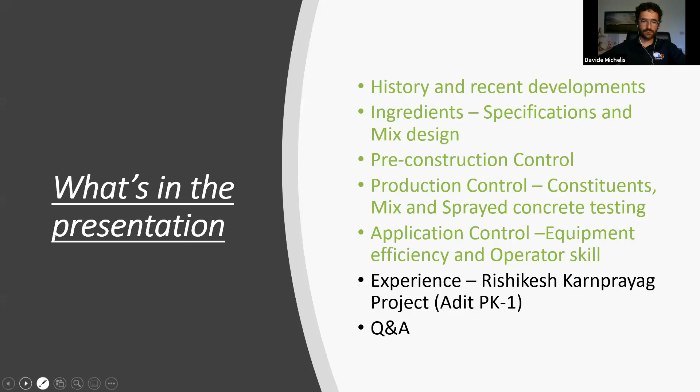Starting from a bit of history about shotcrete, going back to the 70s, where the dry mix process was especially accelerated with alkaline powder accelerators. So we are really at the beginning of the technology employed inside a tunneling project.

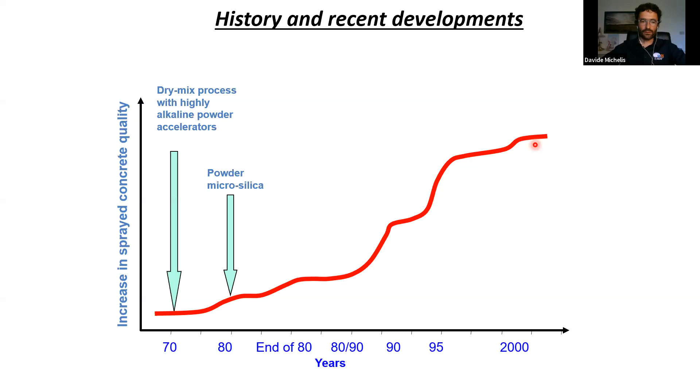In the 80s, there is an introduction of powder microsilica in order to have a better mix design and extend the durability of the mix design. Then at the end of the 80s, we are looking at the introduction of alkali liquid accelerators, replacing the powder ones, especially in the dry process.

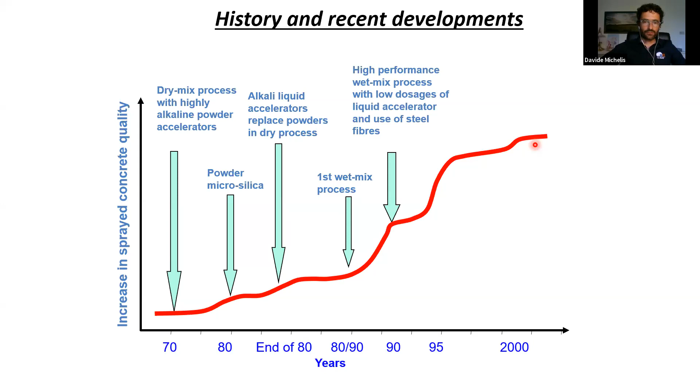Changing from the 80s to the 90s, we are observing the first wet mix process, which is the base of our actual technology, almost employed all over the world. In the 90s, we have the chance to extend performance and get a high performance wet mix process because of low dosages of liquid accelerators. And we are looking also to the use of steel fibers to enhance the flexural strength of the shotcrete.

Then later in the 90s, almost in the new century, we are looking for new alkali-free accelerators. So the technology about the accelerator is changing dramatically, with the use also of microsilica slurries to extend the durability of the final product.

Steel fibers also are enhancing their properties, and the way of application is improved. Luckily, also with the use of very powerful plasticizers, we can achieve water cement ratios below 0.45, which we will see later is an extremely interesting point for having a high quality shotcrete.

And we are passing from a manual application to a robotic spray system, which are giving the production rates that we are having today.

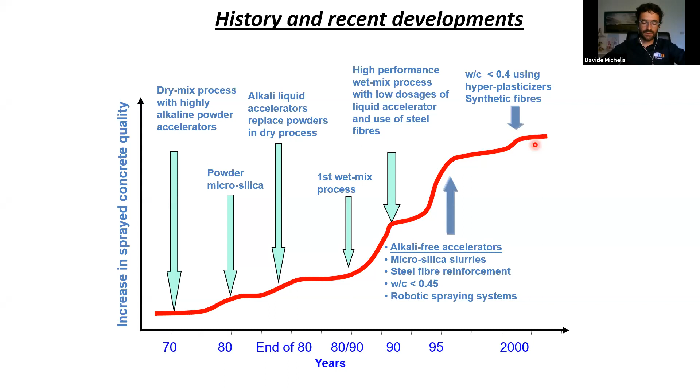Nowadays, we are looking to, and we are succeeding in getting mix designs with water cement ratios below 0.4, and also the use of synthetic fibers, structural synthetic fiber, is spreading around. So we are having very good results also with the use of polypropylenic fibers.

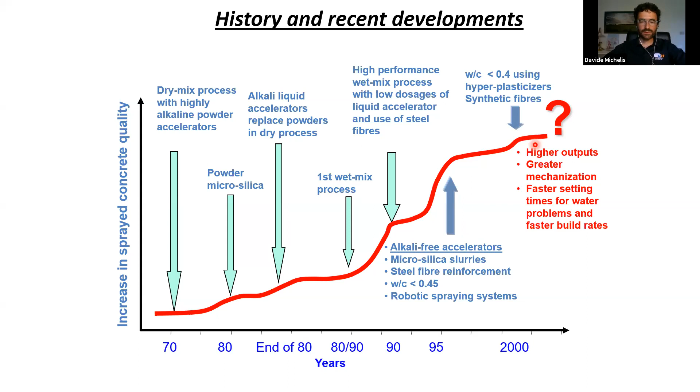What's in the future? Hopefully, also looking for a higher production rate. Of course we need higher outputs, but also enhancing the properties of the shotcrete in order to have a proper thickness applied on the surface, and a proper strength development to get a faster setting time and reduce problems in the presence of high water inflows.

Just some nice pictures coming from the past. On the top left, you are looking at maybe one of the first dry shotcrete machines. It's a picture taken in 1907, so more than 100 years ago.

And you will see bottom left Mr. Carl Akeley, one of the founders, one of the first men to use shotcrete as an industrial process for underground construction. As you can see in the other two pictures, how difficult was the application, especially overhead of the shotcrete, so it was needed to build up scaffolds and use not very automatically driven equipment.

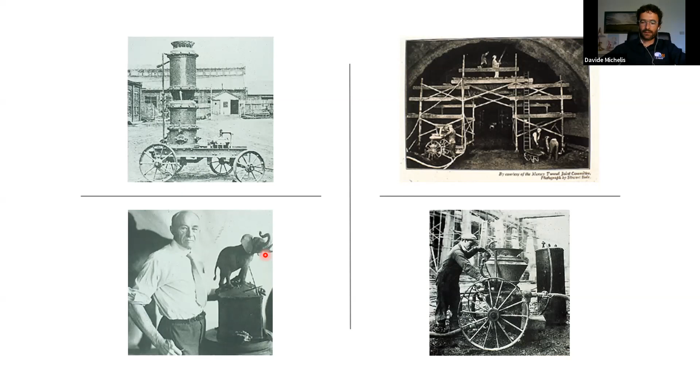And if we compare with the new equipment that is nowadays available on the market, we can understand how much higher the production rate could be, and how bigger and nicer could be the quality of the shotcrete that we can produce in our time.

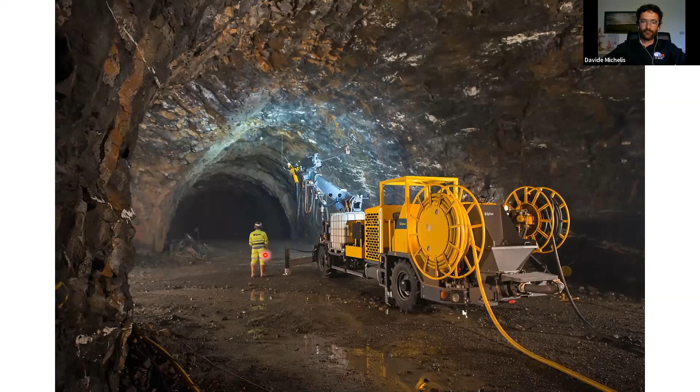So let's start with the ingredients which compose a proper mix design for a shotcrete application. First of all, the cement is of course one of the most important parameters and products that we have to consider for a good mix design, especially talking about the fineness of the cement.

Aggregates, different shape, it depends if it is crushed aggregates or if it comes from a riverbank.

Water, of course, we need to put water, especially tap water, as much as possible in order to get a high quality mix design.

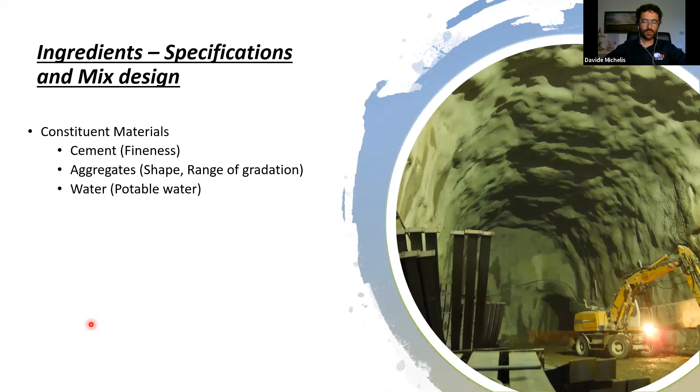Admixtures that are both to be placed inside the mix design during the production process, and also like the accelerators to be introduced in the mix design during the application, right at the nozzle before the product flows out from the boom of the spraying machine.

We can also add, and sometimes it is absolutely mandatory to use mineral fillers like silica fume, microsilica, in order to reduce the water amount and increase final strength and durability of the final product that we are applying on the surface.

Fibers, as introduced before, can be both steel and plastic, and we will see later which ones. This is an additional product that is enhancing the flexural strength of the product.

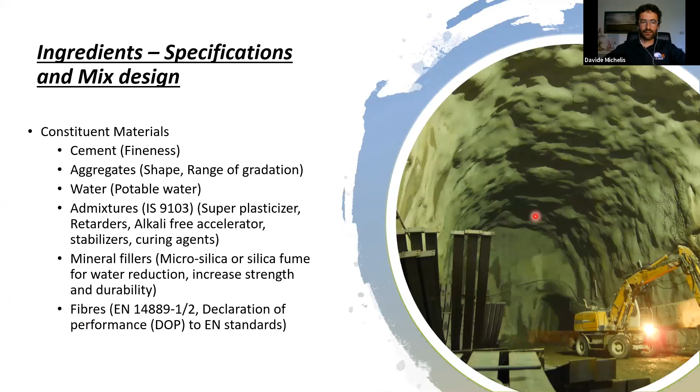Cement, of course. Not all cements are proper for use with a shotcrete mix design. We have to think about what kind of mix design is needed. For example, we need a pretty high fineness of the cement, 350 square meters per kilo, and a minimum amount of OPC of 360 kilograms per cubic meter when we start to design our mix design.

As a general rule, but depending a lot on which country we are designing the mix for, the minimum cementitious content varies between 390 and 450, in some situations even higher, depending on performance required and on which kind of cement is considered for the mix design. The cement type influences a lot the performance, not only the final hardened shotcrete, but especially the workability and fresh status of the concrete. Remember that each recipe is unique, so we cannot replicate a single mix design everywhere, because performance will change a lot according to the cement kind, the aggregates, and the admixture we decide to put inside.

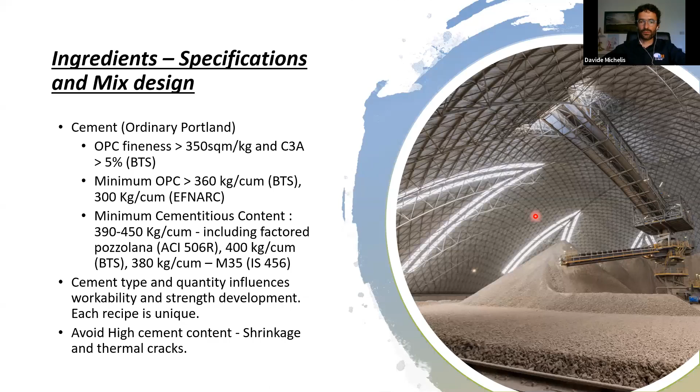Water, along with cement, is I think the most important component to be properly dosed and used, because we need to use tap water. This should not have any chloride, sulfate or oil inside, but especially the water content in the mix design should be as low as possible, lower than 0.45, because the quality of the shotcrete will rise a lot using a low water-cement ratio. The ideal range is between 0.38 and 0.42, and with these values we can achieve high strength and durable shotcrete, but also during the application sequence we can really reduce the rebound. We can even face difficult situations like water at the tunnel face.

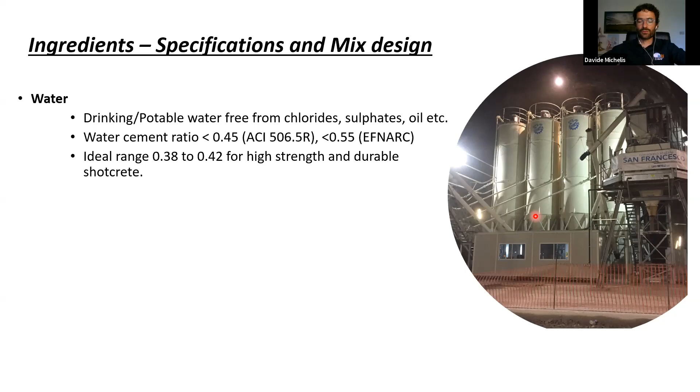To achieve these low water-cement ratios, we can use superplasticizers and retarders, which enhance the workability and the open time before application takes place. Of course, we have to consider which kind of superplasticizer admixture to use in order to avoid any wrong effect on the setting time of the product.

Then accelerators - we have to add the accelerator right at the nozzle of the spraying equipment in order to accelerate a few seconds before the shotcrete hits the surface of the substrate. Adding the accelerator at the nozzle causes a drop in final strength compared to an unaccelerated mix, and this can be up to 70-75% of the unaccelerated mix. But with an alkali-rich accelerator, the drop is not only 20-25%, but we can even achieve a 50% drop. So it's very important to select the right amount of the right accelerator.

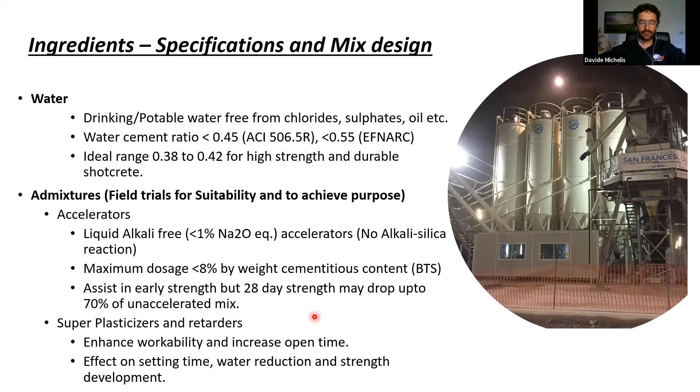This is a scheme that I love to use, because it really shows the concept of water-cement ratio. On your left side, you see a low water-cement ratio mix design, and the components, the aggregate and the cement, are pretty close together. So when the hydration process of the cement happens, there is a better connection between all the components. On your right side, you see a high water-cement ratio mix design, and you can understand very well that it's more difficult for the cement to connect all the particles together. So we are facing lower strength and, of course, higher porosity and permeability.

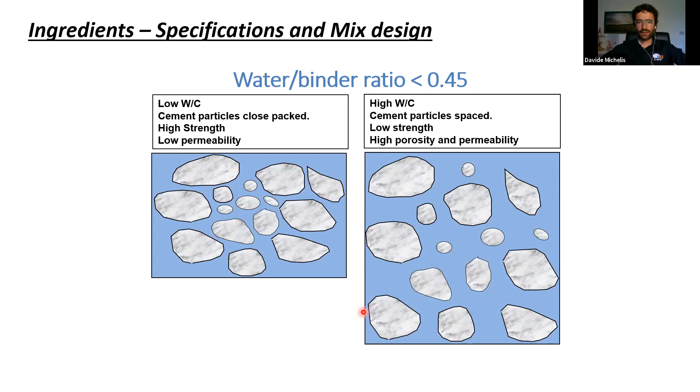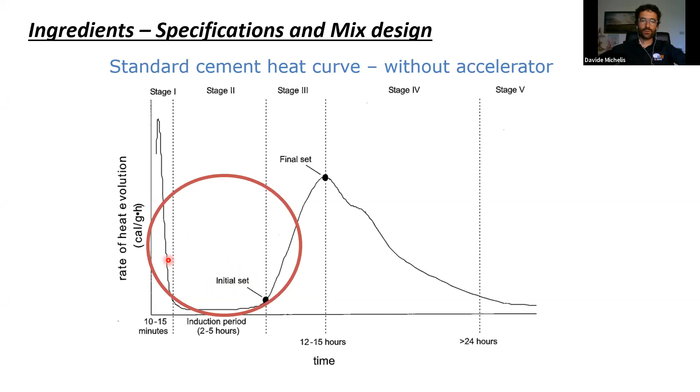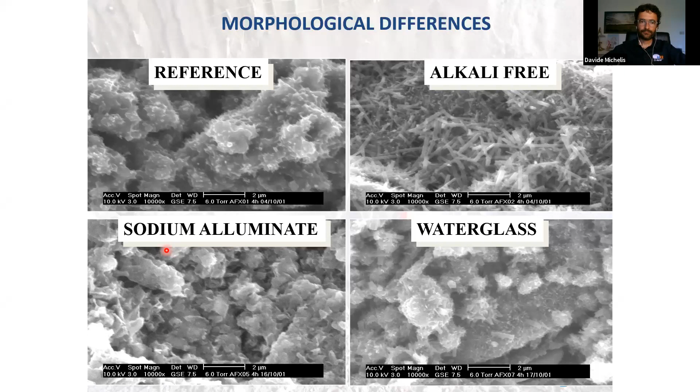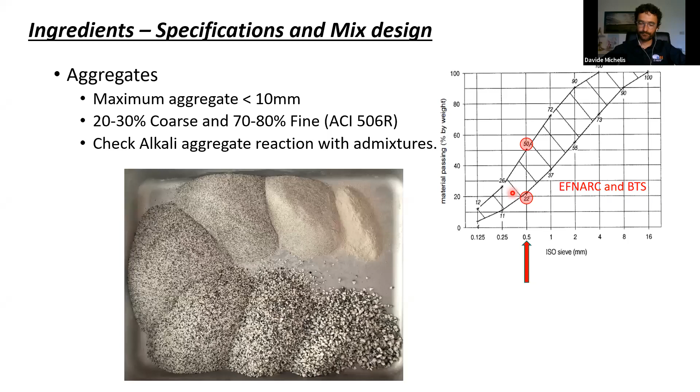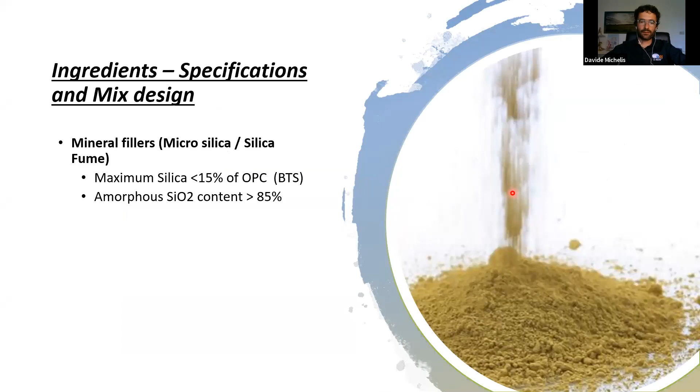There are also some mineral fillers, as additional ingredients. As a rule, we should not exceed 15% of the OPC, and this should have an amorphous silica content higher than 85%, and a very high specific surface in order to be kept inside the mix design properly without any bleeding problems. Of course, the compatibility with accelerator must be checked before any qualification process.

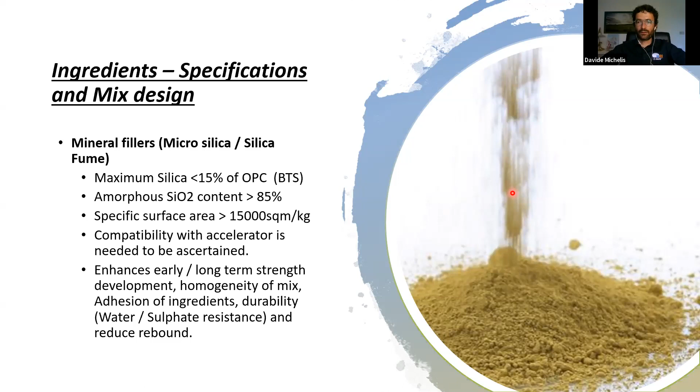What's the aim of putting mineral fillers? It's, as we said already, to enhance the early and long-term strength and durability. And of course, it enhances the adhesion of the mix design during the spraying sequence.

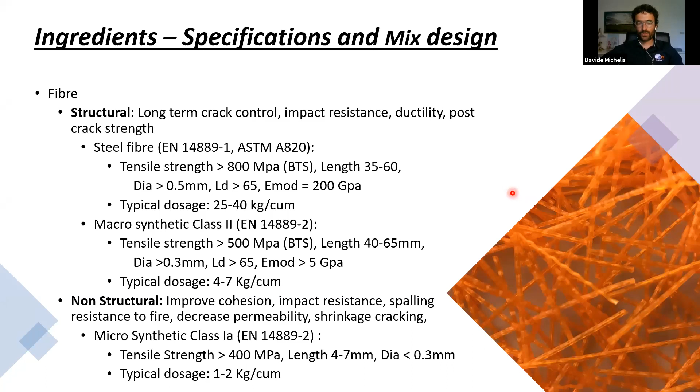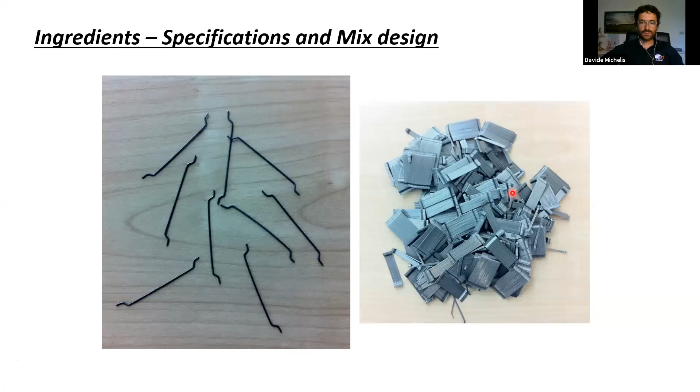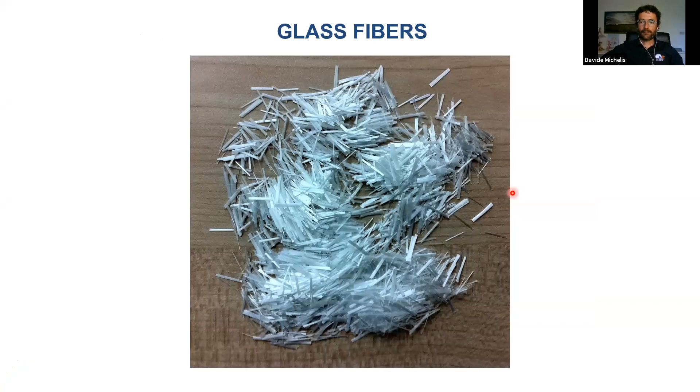Just a few slides. I think most of you already have good experience with steel fibers, hooked and glued together. In some situations, there is also use of glass fibers, but it's really a very small area. Synthetic fibers, as I said, are gaining market share against steel fibers with very good results.

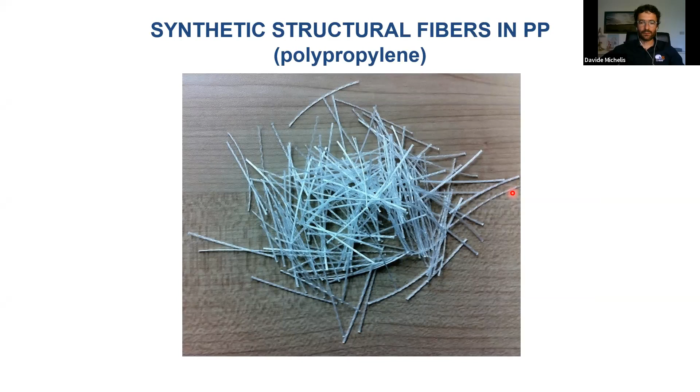I want to complete my part of the presentation by giving some tips about application methods. Most of the application is made with a wet process, but still sometimes there is a need for applying the dry mix method. This slide shows in a very schematic way how the system works.

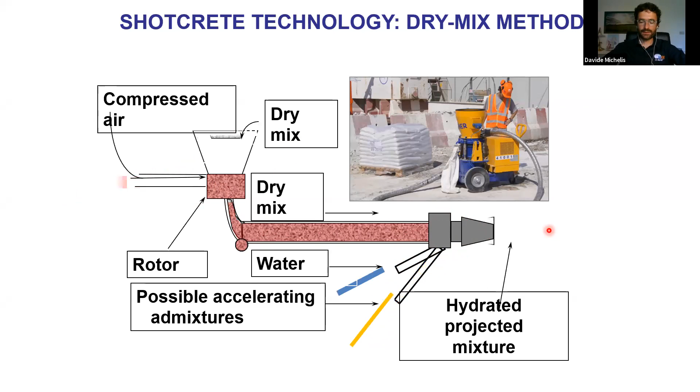There is a hopper where the dry mix is put inside. On the left side, the compressed air pushes the material through the hose, and at the nozzle, only at the nozzle, water and the accelerator are introduced into the flow in order to get the proper acceleration of the mix design.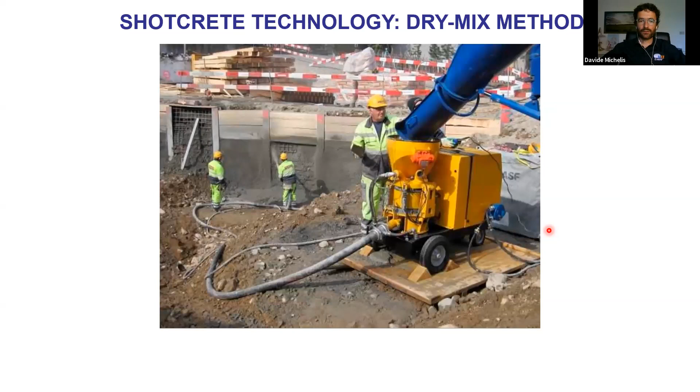This is the kind of normal application, an example of the way the workers are doing the job. Of course, this can be used only for small surfaces, a very confined space where a big boom for automatic spraying is not able to enter.

The accelerator is dosed according to the different situation we may face, depending on whether overhead or on the sides, and we are getting the final shotcrete that is sprayed against the substrate.

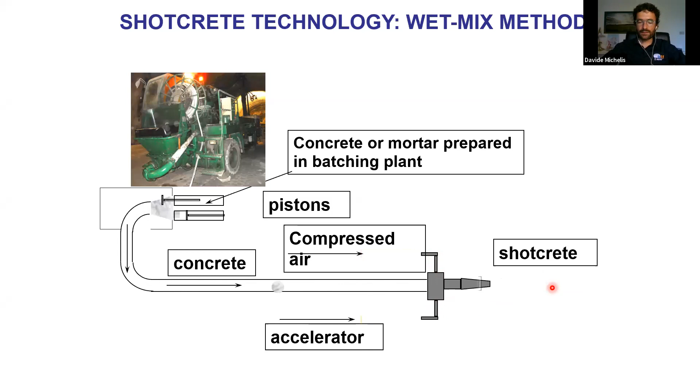Thank you, Davide, and welcome again to all the participants. So we'll be carrying on forward with the pre-construction controls.

As you are aware, before qualifying any shotcrete, we need to control the quality of the shotcrete before actually applying it on site. There are some mandatory pre-construction tests defined in the European norm 14487-1, and we refer to class 3, which is the inspection category defined for underground traffic, railway tunnels and road traffic, and strengthening of the ground.

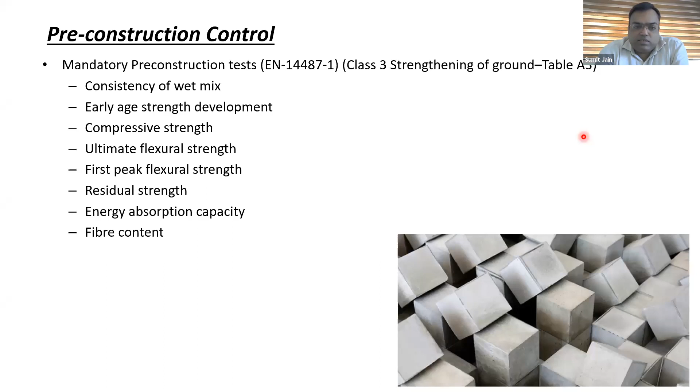There are a number of tests to be carried out: consistency of the wet mix, early age strength development test, compressive test, flexural strength, residual strength, energy absorption capacity, and fiber content. The first 4 of these tests are for plain shotcrete, and the later 4 are for fiber reinforced shotcrete. So the type of test will depend on the type of application and the functional requirement of the shotcrete.

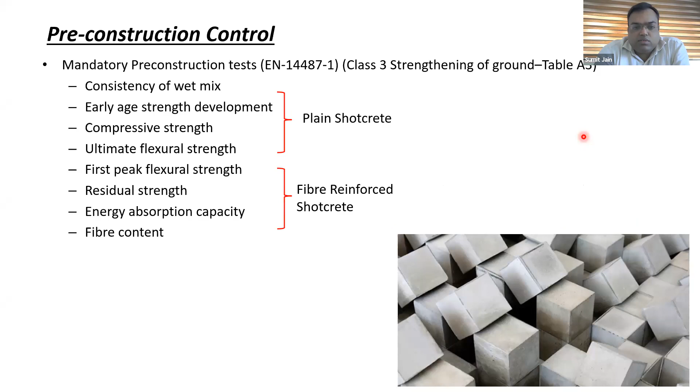Now we will cover some of these tests in brief. This one is the early strength requirement for young age shotcrete, and normally there are 3 classes as per the European norm: J1, J2, J3. Usually we refer to the J2 class when applying in thick layers, including overhead applications, where there is a very high output requirement of the shotcrete, very low water pressure, and load on the newly sprayed concrete from subsequent works.

So when we qualify a shotcrete as meeting the J2 class requirement, all the strength results have to fall above this J2 line. This is a plot of compressive strength versus time in minutes and hours. For the initial period up to 2 hours, or say less than 1 MPa, we use a penetrometer, and for more than 1 MPa, we use the Hilti shot bolt method to test these early strength requirements.

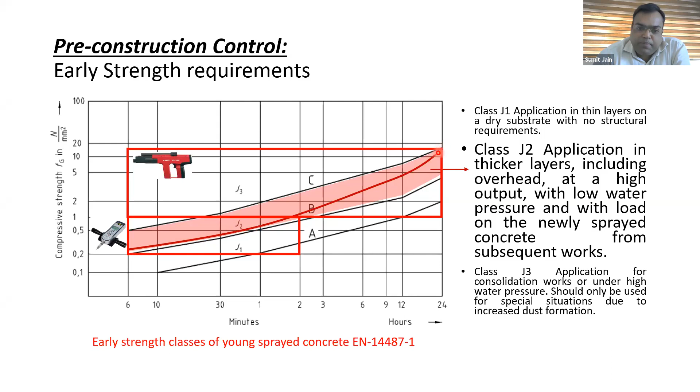Mostly the shotcrete strength should start very near to the J2 curve, and by the end of 1 day, or 24 hours, it should actually reach right up to J3. This is somewhere around 12.5 to 13 MPa, and within 1 hour it should have a 0.5 MPa strength.

Next is the residual strength requirements. The figure shown on the right side is a 4-point bending test. Here the beam specimen is prepared with shotcrete, then tested in the standard apparatus, and the categorization of the class is done by the deflection and the residual strength of the specimen. For example, these are the categories defined in the European norm: there are 3 deflection levels and 4 strength levels.

So if we qualify shotcrete to be D2S2, it should have a minimum residual strength of 2 MPa in the range of 0.5 to 2 mm deflection. The deflection is measured at mid-span of this test.

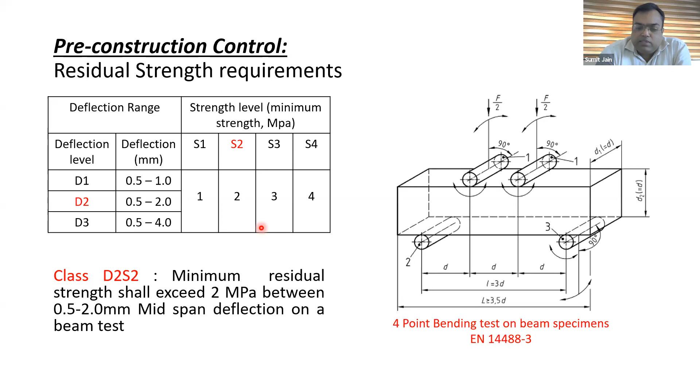We'll just see a graph of how it plots when testing this specimen. As you can see, the strength is gradually decreasing with the increase in deflection. So in the area between 0.5 mm and 2 mm for a D2 categorization, this graph should lie above 2 MPa. This is the 2 MPa line, this is the strength class line, and these are the deflection class lines. In this case, the graph plotted for residual stress versus deflection categorizes as D2S2 class, because all of this curve lies above 2 MPa.

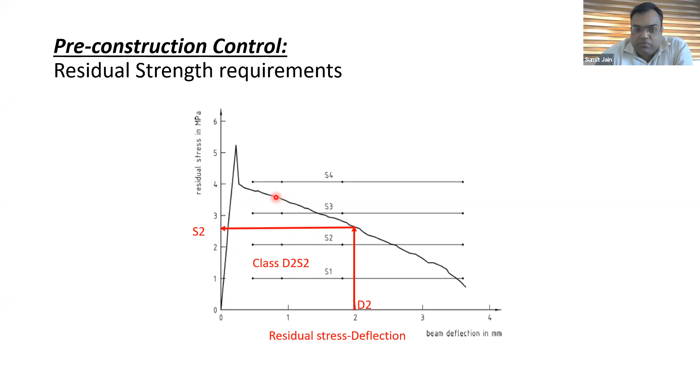Moving on to other requirements, in some projects we use the Q support system, and there is a requirement of energy absorption values to be met before qualifying the shotcrete for various Q classes. This is a graph showing Q value, rock mass quality, versus span or height by ESR ratio, and this is a very well known graph.

Here you can see, in the bottom left corner in green highlight, a different classification of the energy: 3 classes are defined, E500, 700 and 1000. These are the joules which the panel absorbs when tested for 25 mm deflection. We'll cover more on this in the later slides.

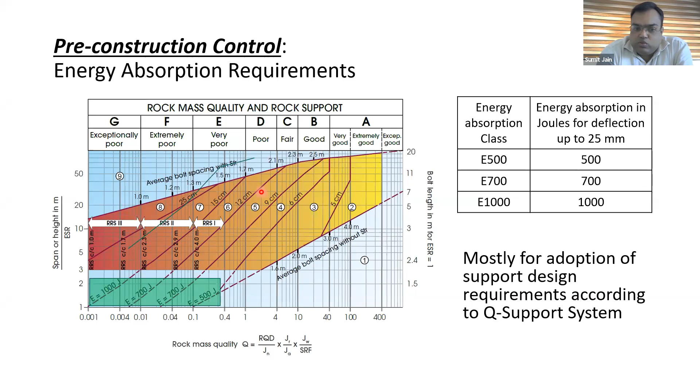This is just a fallback of the previous test. So these can be done on circular panels as well as on the square panels.

Circular panels are tested by ASTM standard C1550-19, and we can see there is a plunger which is pushing the panel in the center, and the panel is held at the bottom at 3 points. This is the typical star crack pattern which we get. As the load increases, the deflection occurs and the crack opens up, and the fibers which are joining the opposite side of the crack, they come into action.

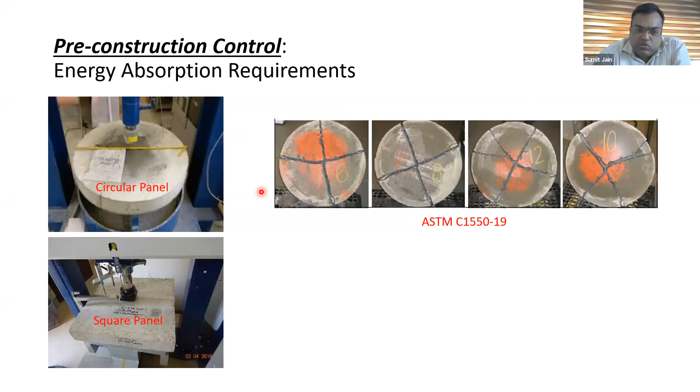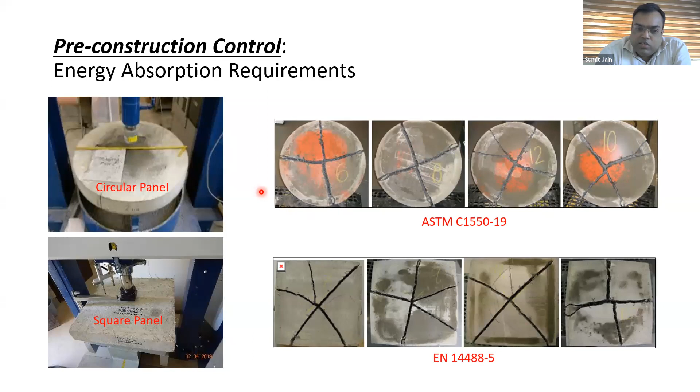The same test we can carry out on square panels. This is a test apparatus for the square panel, and this is the European norm 14488-5, and these are the typical star cracks which we see in the square panels. So depending on the regulation, we can use either of the tests.

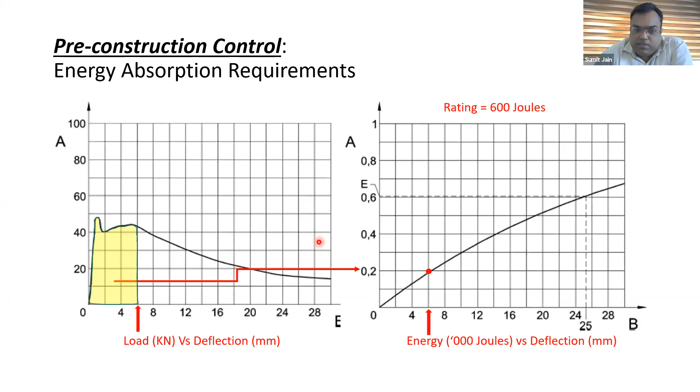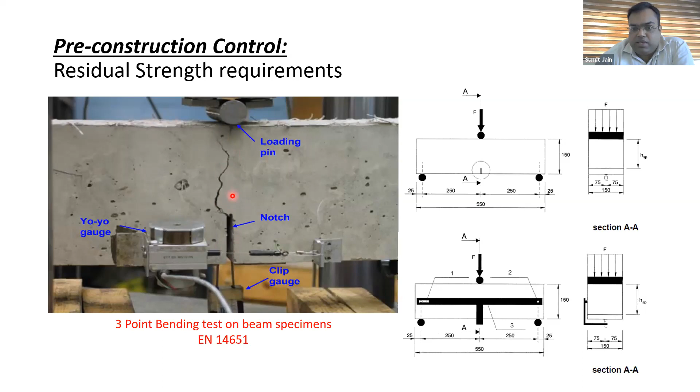In this test, the CMOD of 0.5 corresponds to serviceability limit state, and CMOD of 2.5 corresponds to ULS limit state. The respective values on the load correspond to the stresses. This is the limit of proportionality, which we call FL. FL is computed, and then we get the flexural stress corresponding to FL. Then we get the flexural stress corresponding to SLS state, which we call FR1, and then we get FR3. The ratio of FR1 upon FR3 is actually the ratio of SLS to ULS.

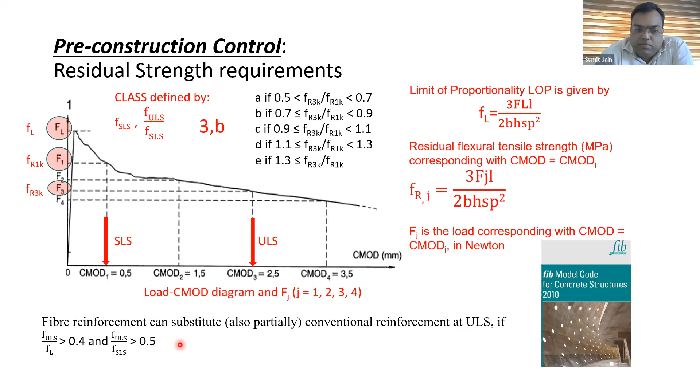Now we go to the production control. Once we have established the pre-construction controls and qualified the shotcrete, we have to qualify the constituents, qualify the mixes, and qualify the sprayed concrete as well.

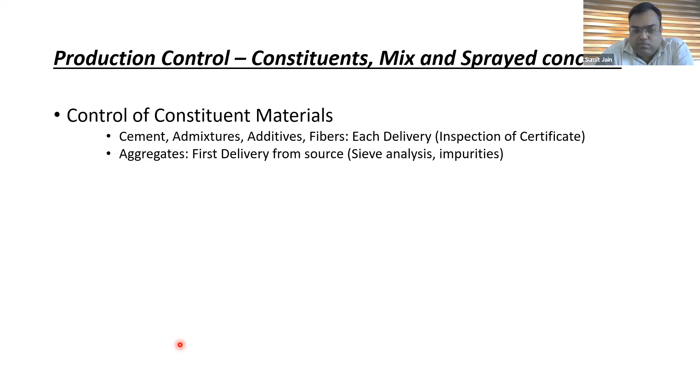When it comes to constituent materials, we have to qualify cement, admixture, additives, and fibers. As per the standard, inspection category 3 of the European norm, each delivery of these constituent materials has to be checked from the inspection certificates. For aggregates, the first delivery from the source has to be checked, which includes sieve analysis and other tests like impurities and alkali aggregate reactions.

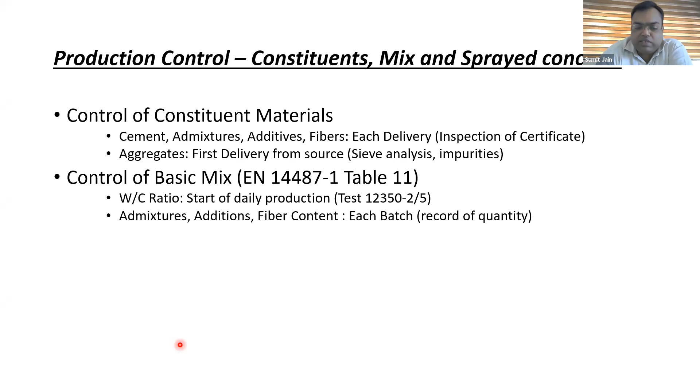Next, we check the basic mix, the water cement ratios, and these are to be checked daily when production is started. Whatever is mentioned in the mix has to be achieved in the batching plant. Then we control the basic admixture, additions, and fiber contents, recorded batch wise in terms of quantity.

Next we go on to control of sprayed concrete. There are various stages of shotcrete. In the initial young stage, also called green shotcrete, the water cement ratio and accelerator are calculated daily, and fiber content is tested once every 100 cubic meters or 500 square meters of sprayed application. In the fiber content test, the individual sampling should have fibers not less than 90% of the target fiber dosage.

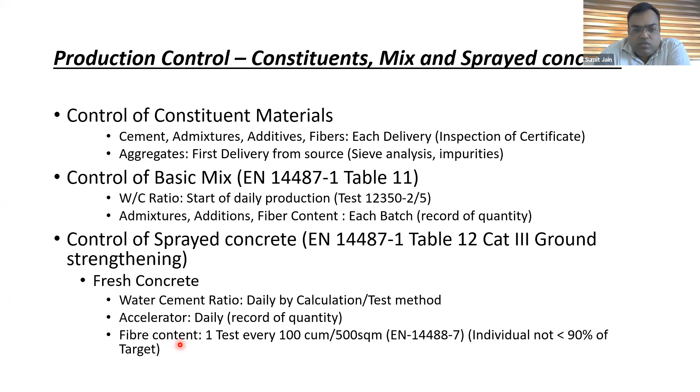Next we move on to hardened concrete. The previous stage was fresh; now we have the hardened stage. Here we have early strength, discussed earlier: up to 1 MPa by penetrometer, 1 to 16 MPa by Hilti shot bolt method. The frequency of this early stage strength testing is one test every 250 square meters or minimum 2 tests per month.

When we discuss frequency, we should always bear in mind that it relates to a particular category of inspection and a particular category of application. This application is ground strengthening and the category is 3. Category 3 refers to the importance of the structure, and ground strengthening is the application we want to perform.

Then we are doing the compressive strength test. Here we are taking out cores from the panel as well as from the shotcrete applied wall or the slope. The frequency is one test every 250 cubic meters or 250 square meters.

Then we have the bond strength. Bond strength is a very crucial parameter in this qualification. It refers to the bonding between the shotcrete and the substrate on which it is applied. If we don't have good bonding, the shotcrete will simply separate from the substrate and fall off in case of any deformations or so.

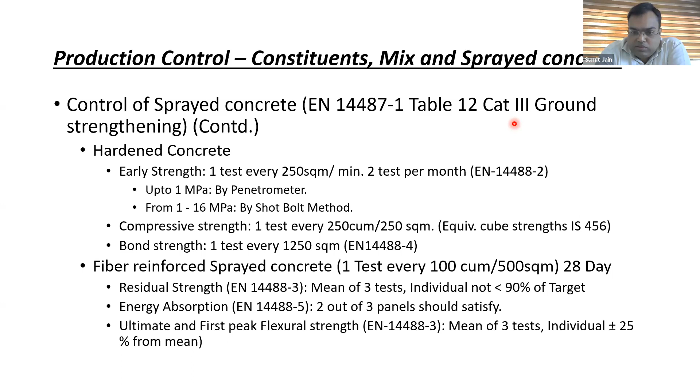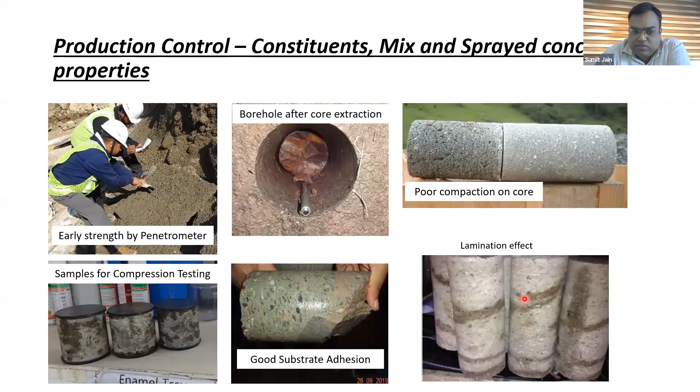Now we discuss the lamination effect, why it is happening, and we have also entered into application control. Application control is a very important parameter of shotcrete sprayed concrete application. The equipment should be very efficient and up to the mark, along with the operator skill, to have a very good quality of shotcrete.

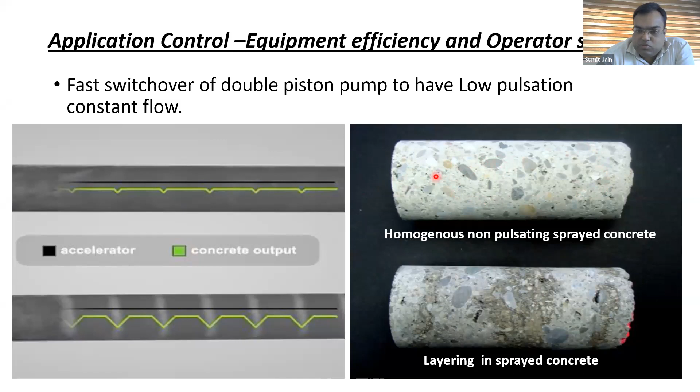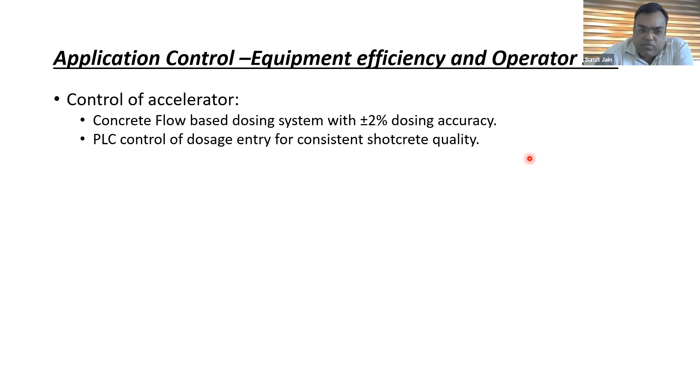Next we come on to the equipment parameters which are required. We need to control the flow of accelerator, which is very important, and a concrete flow based dosing system should be used for dosing of accelerator. So when the concrete is flowing, only then should the accelerator flow; when the concrete is stopped, the accelerator should also stop. This helps maintain good dosage percentage and accuracy for the shotcrete. There should also be a PLC control of the dosage entry.

Then we need a good boom. A good boom is always welcome for the machine. It gives very high flexibility in movement, allowing a perfect spraying pattern, since spraying is usually done in small circular motions. If there is rigidity in rotating the boom, then the pattern will not be achieved. For ease of operation, we should have wireless robo control, and lancing should be there. Lancing is a mechanism in which the distance between the nozzle and the wall of the tunnel or slope is maintained at a constant gap.

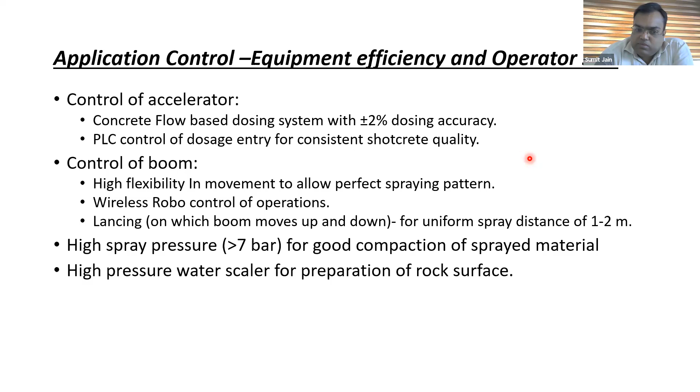Then we should have a very high spray pressure, more than 7 bars, for good compaction of the sprayed material, otherwise you get poor compaction in the shotcrete. We should also have a high pressure water scaler on the machine. This is used to prepare the rock surface, since sometimes there are hydroscaling requirements at the tunnel wall. With high pressure, you can chip off certain loose rocks attached to the substrate.

Data logging of applications is a must to check what we are actually doing inside the tunnel. And last but not the least, an EFNARC certified nozzleman is the best way to ensure that the operator is really skilled.

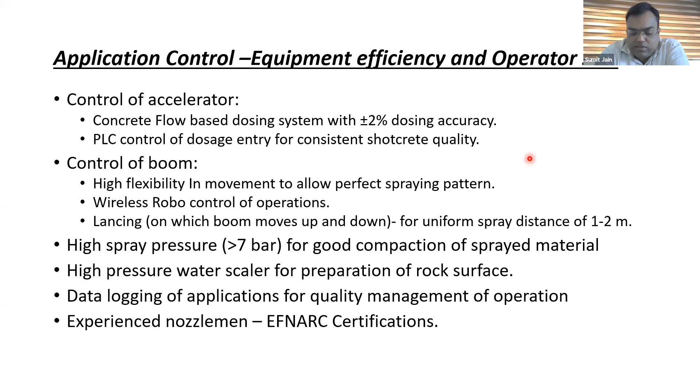Now we cover the important aspects of rebound. Rebound occurs when we are applying shotcrete, and there are various reasons why this happens. The first is definitely the nozzleman's skill and experience; a highly skilled and experienced nozzleman can avoid large rebounds.

Then the spray direction has to be planned when applying, since up direction and down direction give different rebounds. The spray parameters also affect the quantity of rebound, and the mix design is one of the factors. If you have poorly graded aggregate, the rebound will be more. What accelerator you use and how much is the dosage also affect the mix design and the rebound.

Then there is the concrete performance requirement, early strength and thickness of the application, and substrate conditions. If the substrate is uneven or there is a lot of water coming out from the substrate when spraying shotcrete, that will result in more rebound.

Now, efficient application usually can control the rebound within a range of 5 to 15%. So if your applications are within this range, then it's a good job done at the site.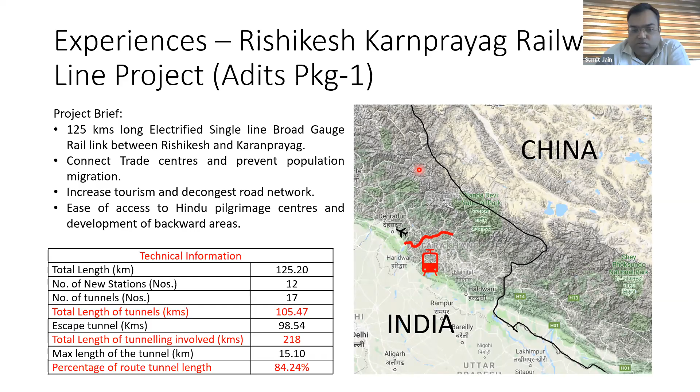On this package, for the adits, we have carried out elaborate testing for energy absorption at 700 and 1000 joules. We were following the Q support system chart on this project. This was the apparatus which we had on site, and we were testing panels right at the site for all the pre-construction and production controls. This was tested as per the European norms 14488-5.

On the right side of the image, there is an LVDT which measures the displacement of the panel, and this is the central plunger, 100 by 100 mm, which loads the specimen at the center. Here you can see a display control, where all the graphs are instantaneously displayed on the monitor, and after the test is over you can get a printout of what you have done.

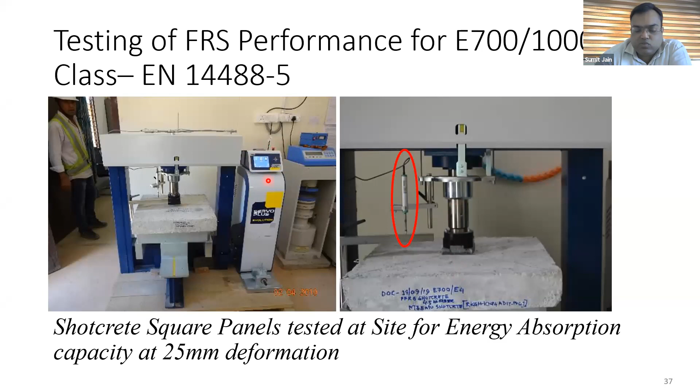These are some of the images we have tested. The first image shows the load gradually applied on the panel. This is the instantaneous load curve, and this is the cumulative energy curve, so two curves are getting plotted simultaneously. Up to a displacement of 7 mm, things are moving on very well, with 2-3 ups and downs.

Now, as we have reached 20 mm, here you can see the panels are getting uplifted. All four corners of the panel uplift because cracks have started forming, and the panel has left the apparatus. This graph corresponds to this image. We can see a ductile behavior because this panel has fibers in it, and the energy is gradually increasing.

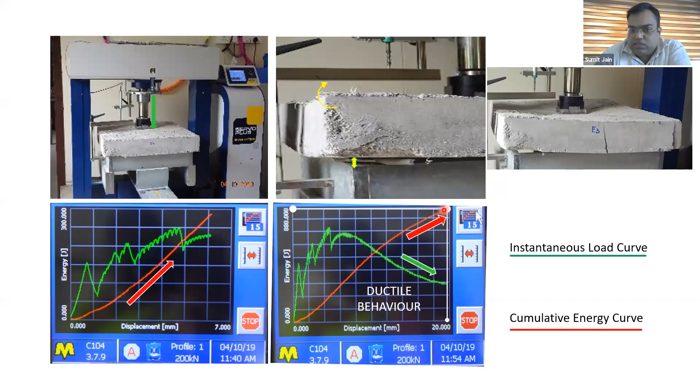A more careful study of the graph showed that the three peaks and three falls in the graph correspond to the cracks. This red peak, when the load went down suddenly, was the first crack appearing. The orange reflected this crack, and the yellow one was this one. Initially the load builds up along with the displacement, and the curve is really smooth, with no waviness, so we can say the concrete was taking all the load.

Then the first fracture happened, and things started building up again. Now you can see slight waviness in the curve - these are fibers getting into action. They rise to a particular limit, then drop, rise again, drop again. This is the place where the displacement increases at a much higher rate compared to the load. So here you see all the waviness - this is the ductile behavior starting in the specimen, with fibers acting as the fracture width increases.

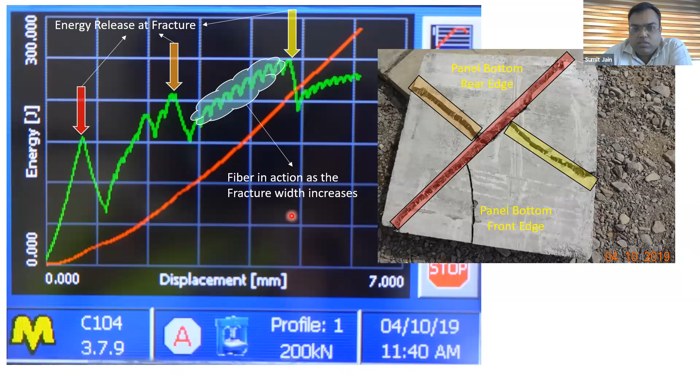These are some of the site photographs. The purpose is to emphasize that the more the testing is carried out, the better quality will be achieved at site, and the more confidence everybody will have with the work being done at the site.

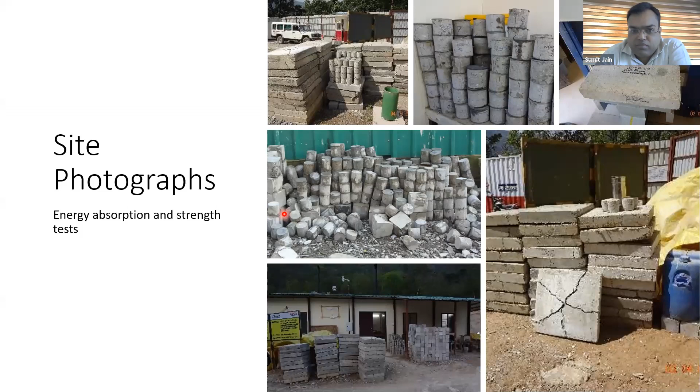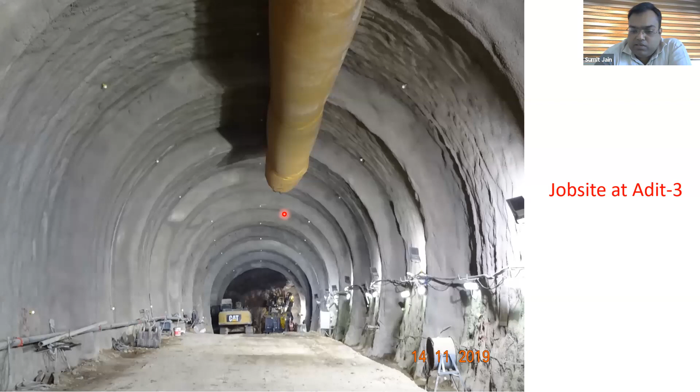We also studied adding microsilica in the Shotcrete mix. This one is without microsilica, which was the contractual requirement. We had mentioned 450 kgs of cement, added 27 kgs of accelerator, and we got an energy absorption of 124 joules with a 28-day core strength of 44 MPa.

We also reduced the accelerator dosage by 7 kg. So all this is being saved - this is money saved - and still the energy we are getting is more than what we got earlier. So this clearly establishes that adding microsilica actually enhances the durability of the Shotcrete.

Because of a good mix in the hardened state, the fibers are really playing their role, and even the coefficient of variation was very less - only 3%. So we were able to replace 65 kgs of OPC by adding just 15 kgs of microsilica, corresponding to M35 E1000 joules.

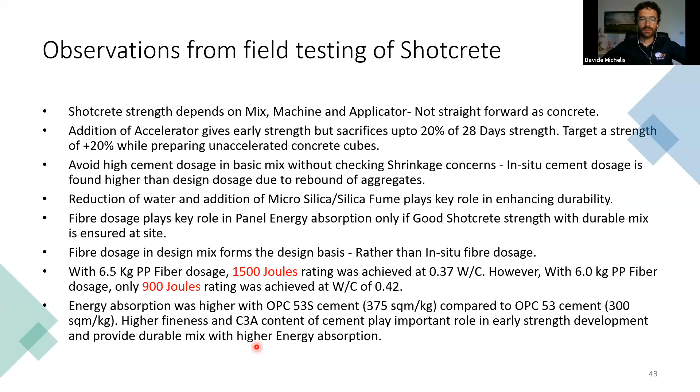Okay, of course, as we mentioned during the presentation, each mix design is unique. So it's very difficult to write on a technical data sheet, talking about workability extenders or retarders, what is the ability of each admixture to increase the workability.

Each mix design depends on the cement kind, because each admixture works on the cement. So depending on the kind of cement available or decided for the particular mix design, tests must be done. We can have very high reactivity for certain cements and others with less reactivity, so we have to increase the dosage per kilogram of cement. As Mr. Jain said, it's really needed to conduct a pre-trial test to assess what kind of admixtures, workability extenders and so on must be used for the particular mix design.

I would also like to add, since we've been involved with a lot of additives in India across various sites, the same additive may work very well in a region in the north and may not work in a similar mix design in the south. It depends upon the clinkers, the source of the cement, and where the aggregate is sourced from. So sometimes we have to really modify the additive as per the local mix design. Generally in a technical data sheet we mention dosage limitations, like from 0.5 to 1% or 1.2%, but it can vary plus or minus 2-3%, depending on the temperature and aggregate condition.